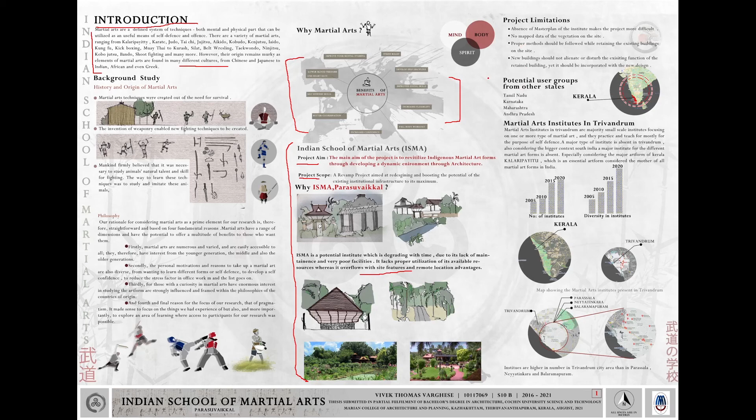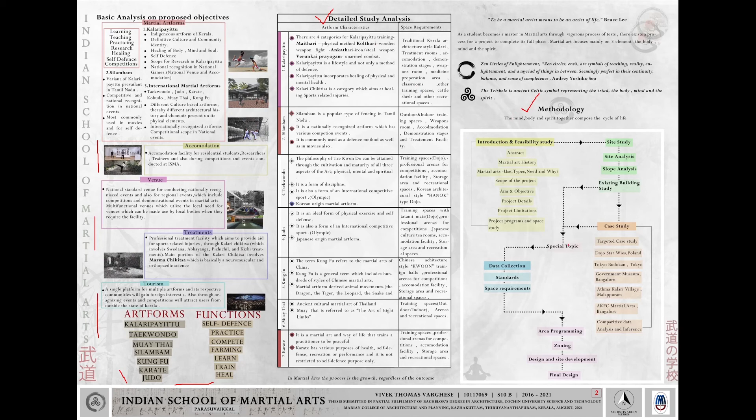Moving on to the next part, which begins with case studies for understanding the cultural, architectural, and other factors that aid in designing a martial arts institute. Five case studies were identified and analyzed to procure the inferences required for better understanding the thesis project.

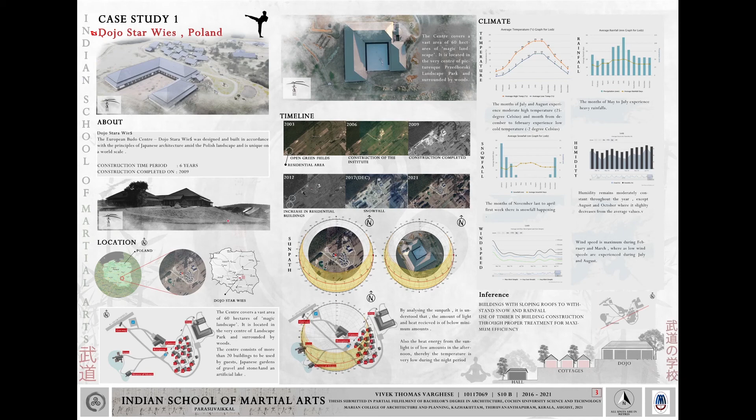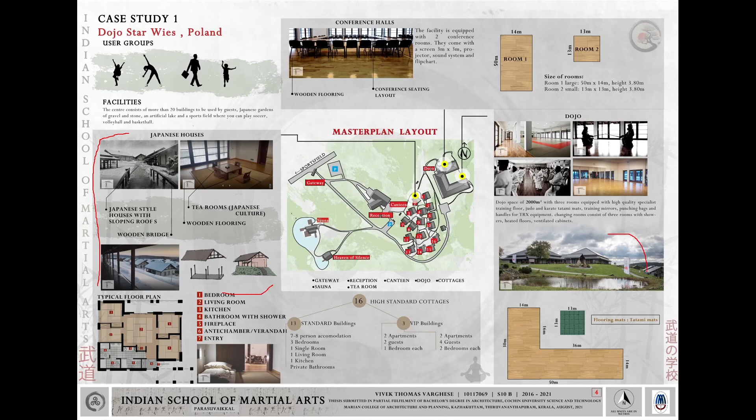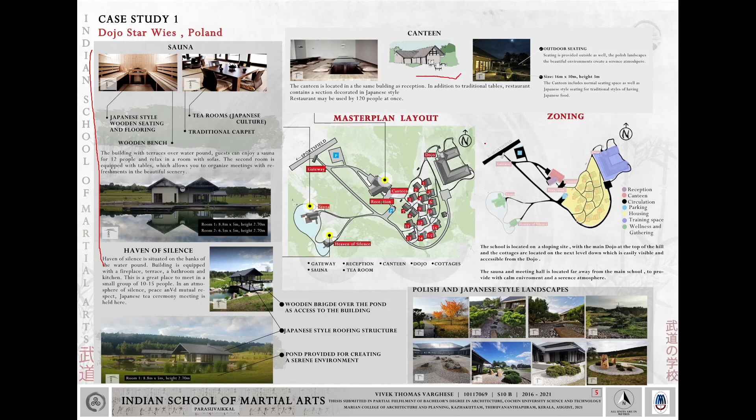The first study is based on a martial arts institute in Poland named Dojo Stara Wies. This is a unique martial arts institute combining Japanese architecture style with Polish landscapes, strategically situated on a sloping terrain. The major focus is the relationship of the Japanese style features with the sloping terrain, which creates spaces interactive with the users as well as the climate of the place. The development of the dojo on the topmost portion of the contour is also a prominent feature studied and considered for my project.

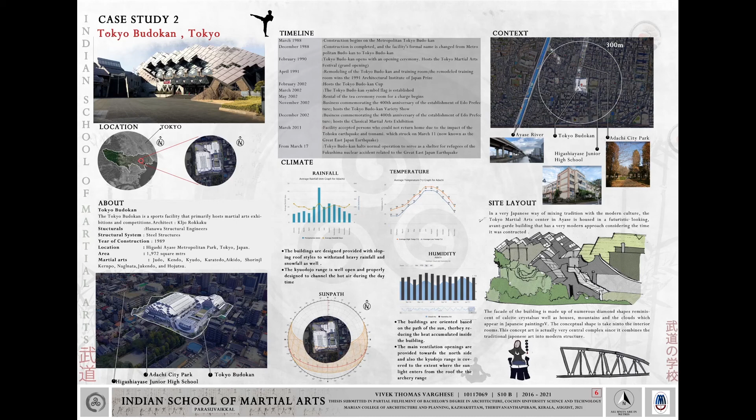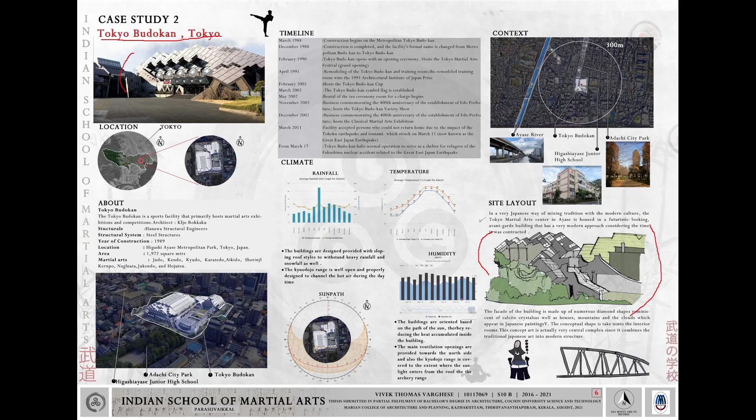My second study is based on Tokyo Budokan situated in Tokyo, a martial arts center larger in scale that provides support for various martial art forms and also works as a venue. The main inferences are observed from architectural elements influencing the design in the form of its exterior and interior form developments, and also analysis of the multi-level training areas.

The third study is a short study conducted at the Government Museum, Bangalore, to observe and analyze ancient weapons used in combat and to study preserving martial art weapons.

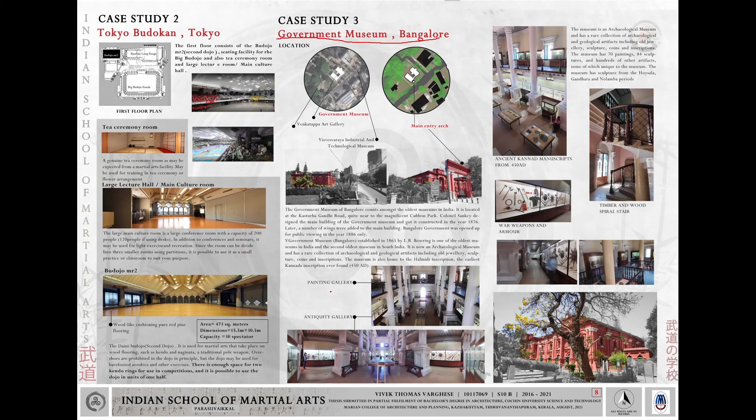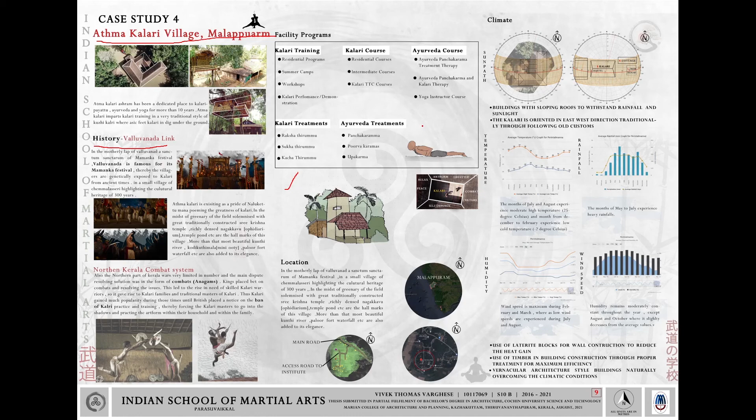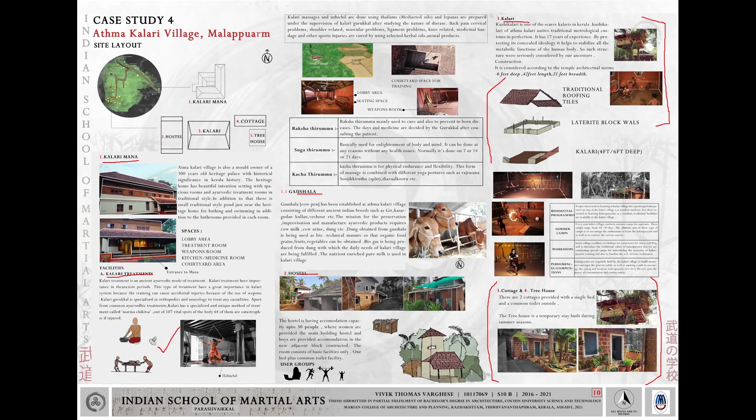The fourth study is conducted at the Athma Kalari village in Malappuram, a martial arts institute with roots from the Valluvanada era onwards. The traditional Kerala architecture style can be observed here, as well as the Kalaripayattu lifestyle, which is the major element focused on. The Atmakalari village has a Kalarimana training area, accommodation facilities, and programs required for Kalaripayattu. The major areas of interest are the community lifestyle of the Kalaripayattu students, the cultural aspects of Kalari Chikitsa methods, and the traditional Kerala architecture style that syncs with the community in this Atmakalari village.

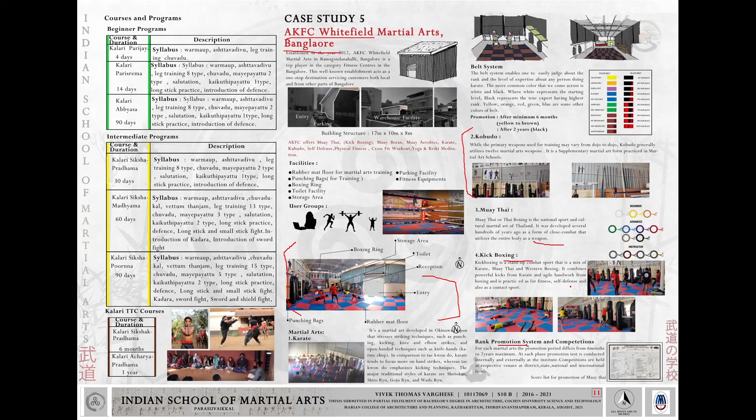Moving on to the next sheet, the comparative analysis matrix. This helps in understanding the relation between art forms and spaces in architecture, the material influences, the architecture styles, and the terrain influence, as well as the influence of art forms on creating the architecture style, which will be taken into consideration while progressing on the design stage of the thesis project.

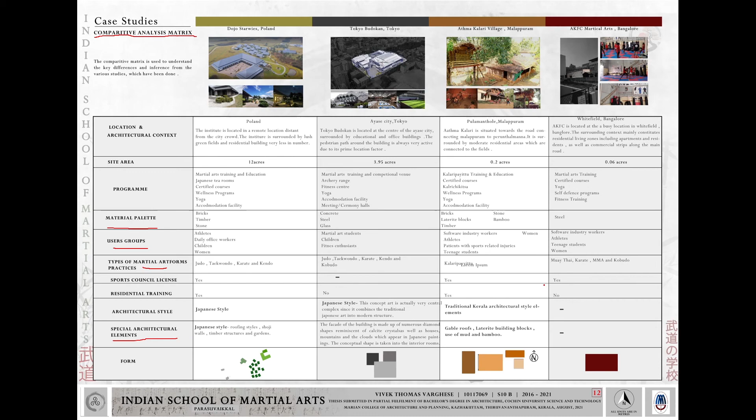Moving on to the next stage, the site study and site analysis. The Indian School of Martial Arts is located in Parasuvaikkal near Parassala, which is 30 kilometers from Trivandrum. The site is 300 meters from the National Highway 66 and easily accessible from the main road. The site has a total area of 8.5 acres of land, distributed over a contour terrain, with entry from the upper contour part.

Also, the site has existing structures in it. As the site already has a functional martial arts institute, the site feasibility becomes more solved. These diagrams show the context layers around the site, as well as the climatic study of the site area.

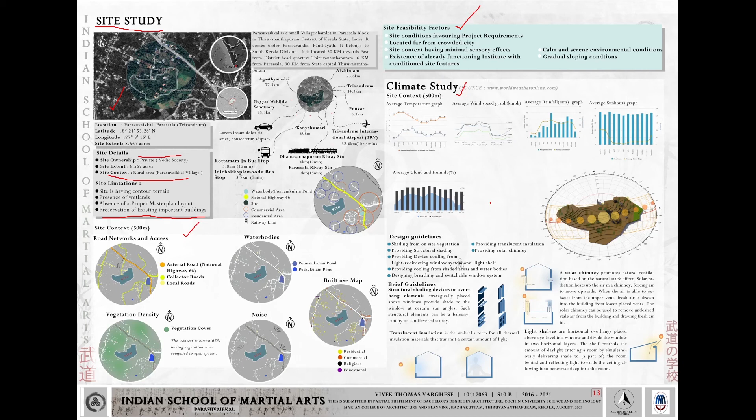The vegetation in the site covers up almost half of the site. The existing circulation path provides access to almost 25% of the site. The vehicular movement within the site is restricted more compared to the pedestrian pathways on the site.

Slope analysis has been done to identify the areas of ridges and valleys and also to maintain the watershed areas. The major factors to be considered are the extent of the agricultural land at the bottom of the site and also the watershed area on the site, which should be preserved for the natural water to drain from the site.

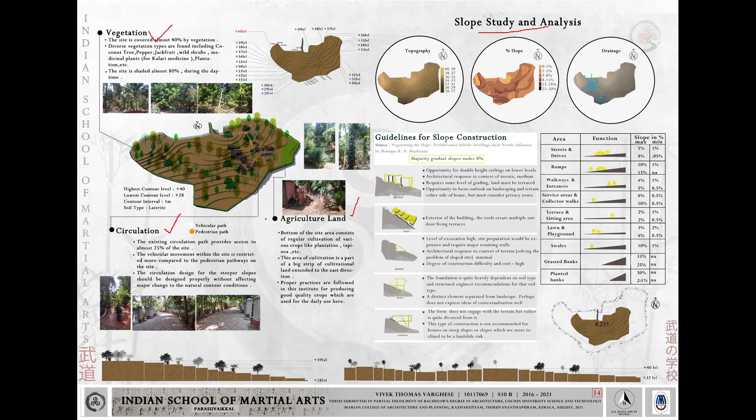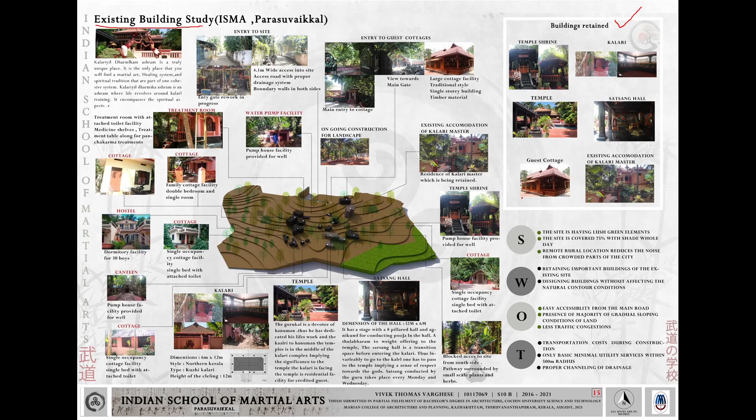Moving on to the design program and its users. Users are grouped and identified based on the context as well as the functional need of the average user, and classified into these aspects, which includes children, athletes, tourists, working people, and etc.

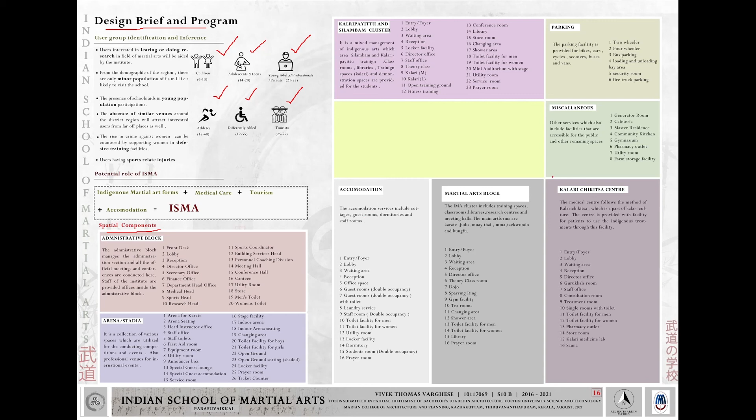Also, the spatial components are identified and tabulated based on the case study analysis as well as the existing features on the site.

Moving on to the area programming. This was tabulated by analyzing the requirements of the design programs and its spaces. Also, the spaces analyzed from the case studies were compared with the respective standard areas and tabulated to a total area of 11,353 square meters.

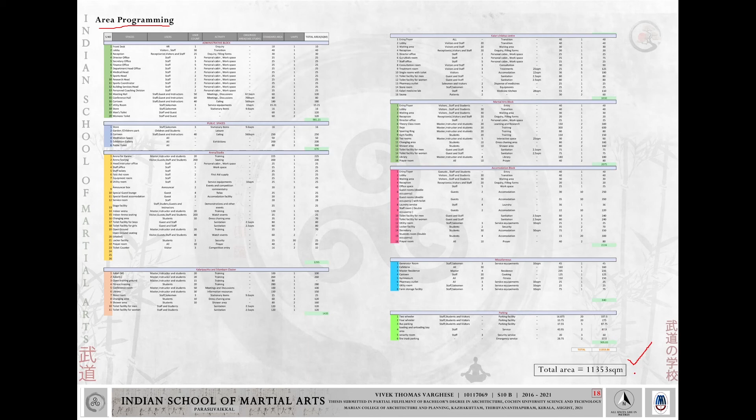Moving on to the next stage, that is zoning. The basic blocks included in the zoning process are the administration, the accommodation block, the Kalari Chikitsa block, martial arts block, arena, canteen and cottage areas, and other spaces. The zoning procedure initially followed a basic proximity matrix, hierarchy charts, and a bubble diagram to identify and analyze the spaces coming in various proximity zones and their respective functions.

The arena is located on the higher level on the site to highlight its importance, as well as for the easy development of the training spaces around the topmost corner of the site.

The accommodation blocks are positioned near the end of the site and close to the agricultural land due to the calm environment. The Kalari Chikitsa and the accommodation facility are positioned closer to each other so that users can access the treatment facility near the accommodation facilities.

A zoning development was followed to resolve access and preferred orientation profiles based on many site features, by understanding the sun path, vehicular access, and the proximity of adjacent buildings.

The watershed area on the site was carefully considered to avoid damaging the drain pattern. After considering factors like wind pattern, proximity matrix, sun path, and other variables, a basic zoning layout was prepared, and the initial zoning layout was developed.

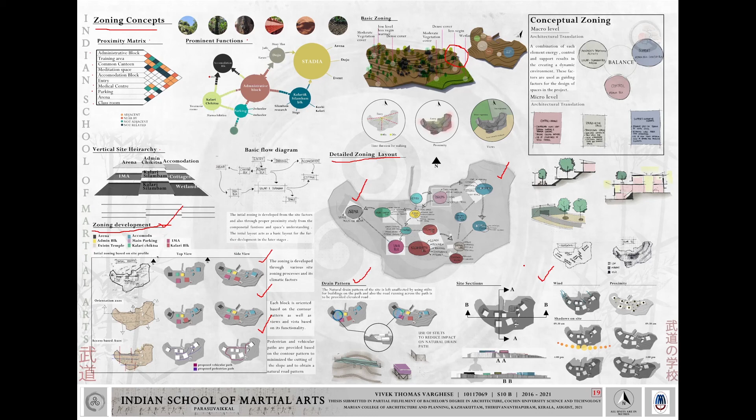Before reaching the master plan, the special topic is applied as a major design guiding factor. For the special topic, the idea focused on symbolizing bamboo in martial arts.

Bamboo is a common material in the world of martial arts. Even from ancient times, bamboo sticks were used for combat. Every martial art form in the world that uses weapons always starts with bamboo canes as the initial weapon of study.

For understanding more about the topic, the types of bamboo and its main features were studied along with its joinery details. From the spiritual aspect connecting bamboo to the mind, the hollowness of bamboo is symbolic of emptying the mind so that present mind ability is achieved.

Thus, bamboo is not only used as a material in this project, but also to reflect the ideologies of different martial art forms practiced here. This helps guide the direction of the design stages of the thesis where it is applied in practice.

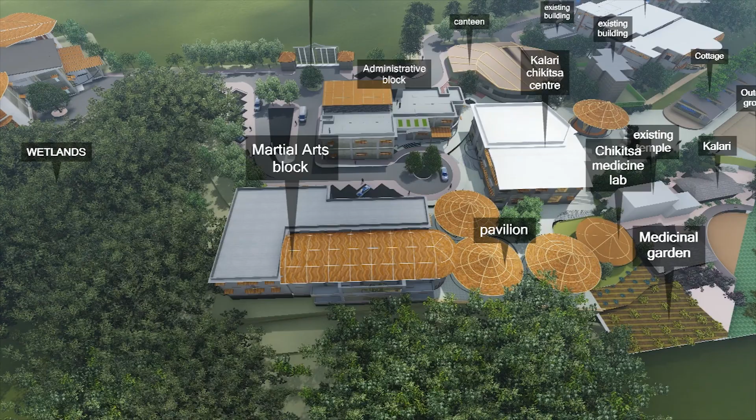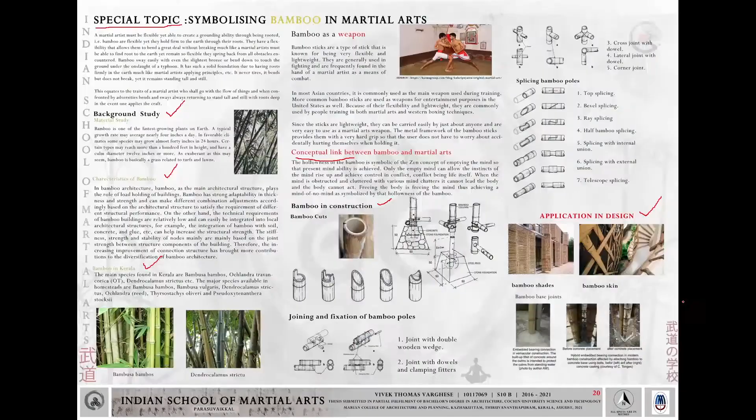The main gate entry into the site is welcomed with a roundabout with a large lush green tree, which gives the user a sense of calmness.

The user can proceed straight down the road and access the drop-off into these three blocks in this area, through which the Kalari and adjacent blocks can be reached by walking through this pathway.

This is the core portion of the site, consisting of the main components: the admin block, the Kalari Chikitsa block, and the martial arts block.

After this point, the user can drive back into the parking space provided or reach the arena through this direction. The arena is located far away from the blocks to maintain proximity and achieve a calm environment.

The accommodation portion of the site is concentrated towards this side, where the hostel blocks, cottages, and existing buildings on the site are present.

The existing buildings on the site were a prominent factor to be considered while zoning the layout. The existing accommodation and Kalari buildings have maintained their original positions on the site, and the rest of the layout was developed around them.

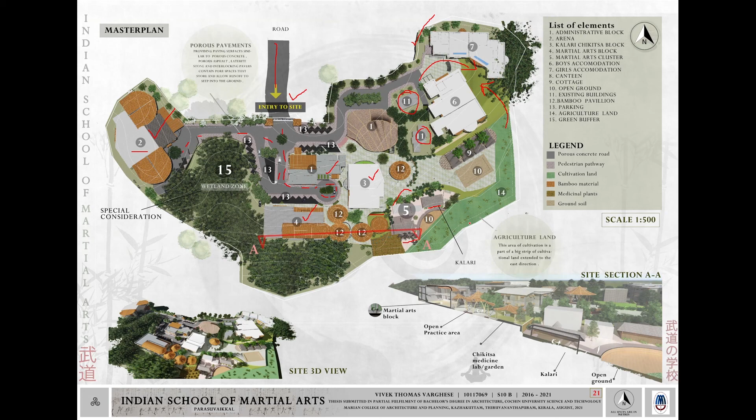These are the 3D aerial views of the site.

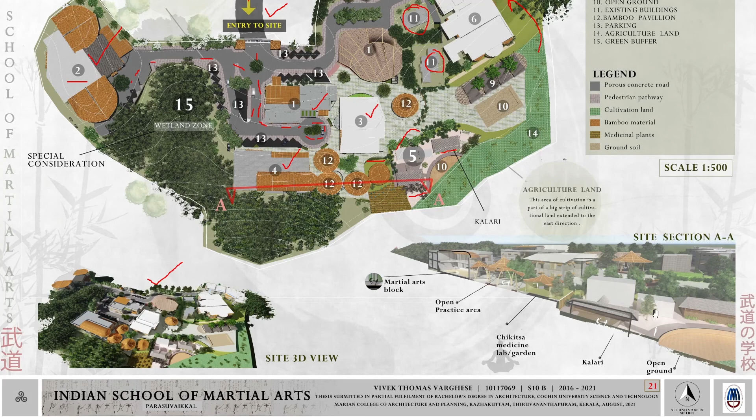This section cuts parallel to the contour directions, showing the Kalari towards the martial arts block. This stretch cut is the main activity area of the site, as the martial arts, combat training, and training happen majorly in these areas.

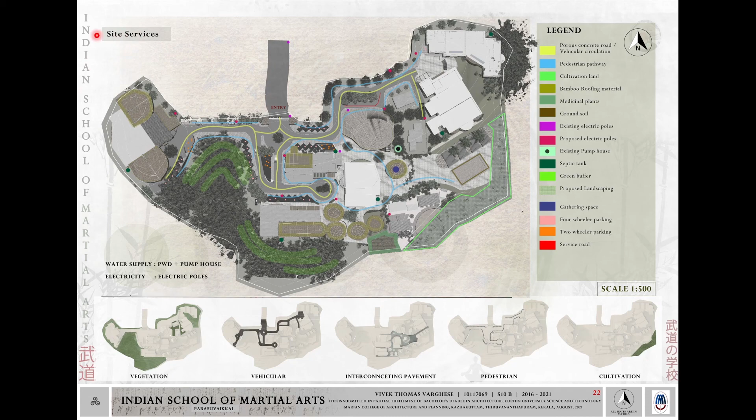Next, moving on to the site services and layers. The site services sheet includes the layers of the site layout as well. Shown below are the walkways, vehicular paths, agricultural area, pedestrian paths, and vegetation on the site.

The major highlights of this sheet include the dense green buffering around the wetland area, given to minimize the damage caused to the terrain.

Also, the agricultural land on the bottom is allowed to seamlessly merge with the design of the layout so that it can be used as an element for capturing the view from the cottages and the hostels.

The canteen is provided with a service road for managing service transports without any issues. Other basic services like electric posts and pump houses can be seen in this layout with respect to the legend provided.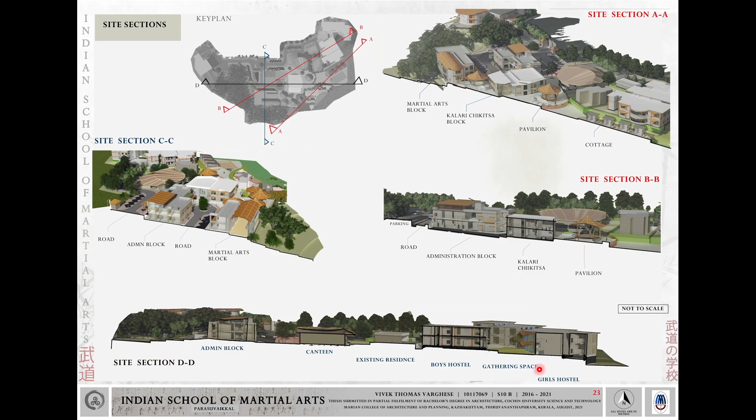Moving on to the next sheet, which is the individual block plans. The administration block.

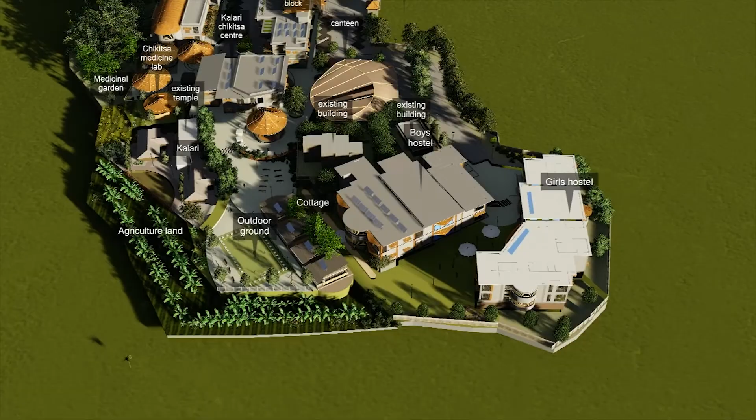The administration block is located at the central portion of the site, which is easily accessible from the main gate. The main entry to the administration block is from this point on the road, which is a drop-off for the admin block. These are the office spaces inside the administration block, and the staircase is positioned on the other side of the block. The toilet area is placed facing the back of the block to avoid the wrong flow of ventilation of bad odor.

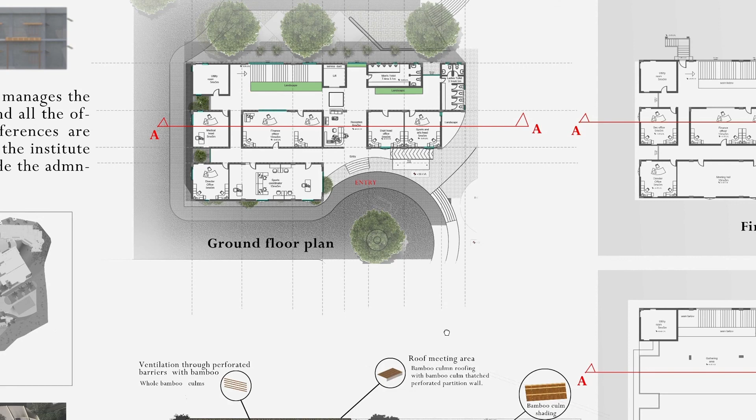In the section AA, it cuts through in its direction. We can see the activities taking place inside the administration building and also of the immediate environment like the parking spaces of the facility. The most ventilation openings for the admin block have been given with the use of bamboo poles, which are used horizontally for better aesthetics and also for maintaining the natural airflow without disrupting it.

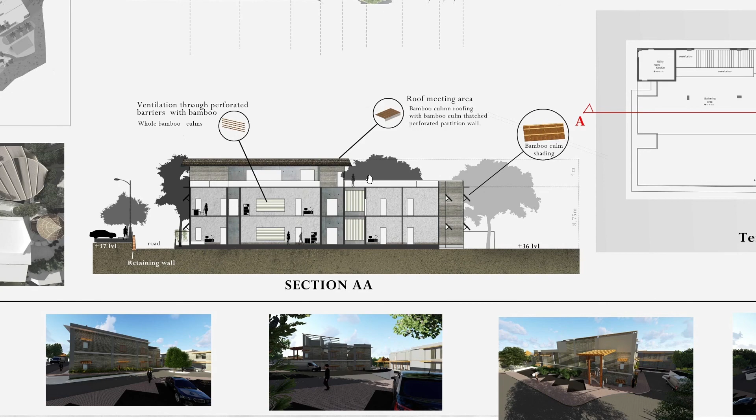This is a staff-only entry provided on the first floor of the administration building, which is accessed from the main road. The terrace floor is provided with a bamboo-roofed structure for shading purpose, and this area is also considered as an informal meeting space for the staff.

These are the 3D views of the building.

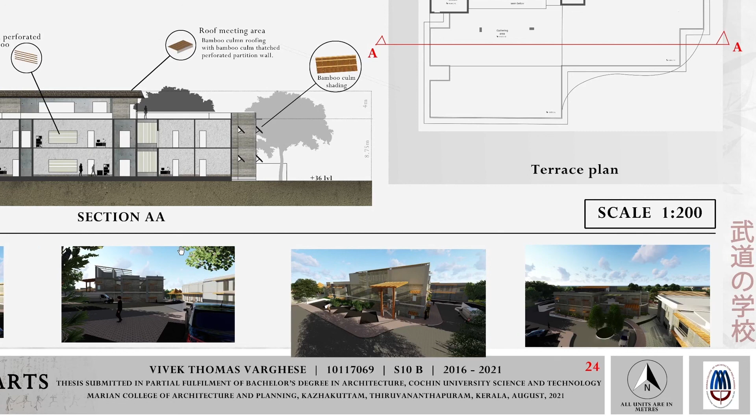Next, moving on to the next block, which is the arena block. This is the main competitional venue where the special competitional events take place inside the site.

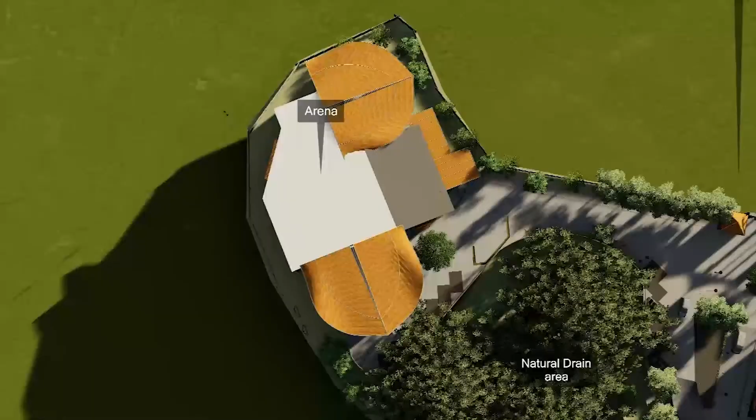The position of this block is on the topmost level on the site. The whole block is resting on 3 contour levels, which is a total of 3 meter height. This is the main entry towards the arena block, with a drop-off coming at this point. The drop-off is provided with staircase access and ramp access.

The reception and locker facility is provided near the entry portion, from where access to the next level, 2 meters above, is given using both ramp and stair access. In the next level, 2 meters above, the facilities provided are 2 dojo spaces, which are training spaces or competitional venues with seating for judges, participants and audience.

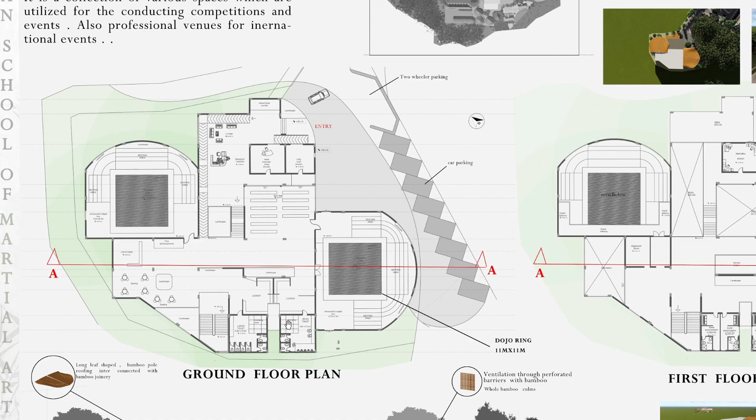Also, a cafeteria is provided along with the toilet facility that has locker and changing area facilities. This is a common area point for the participants to gather around and prepare for the respective competitions.

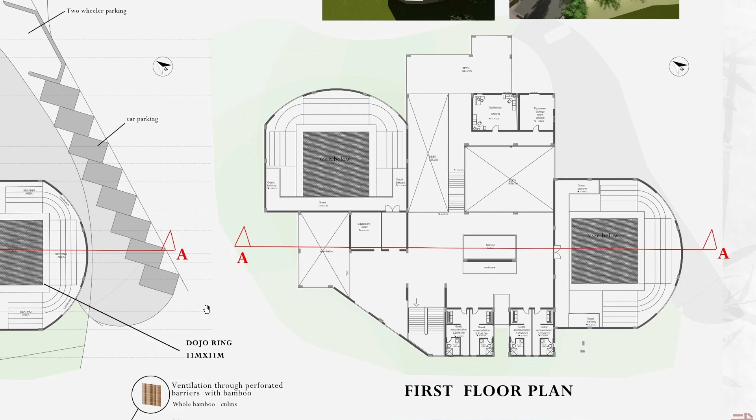The next floor can be accessed through the staircase. The next floor holds guest rooms, office space and also access to watch the competitions from the balcony for the special guests. In section AA, it can be observed where the balcony portion can be seen.

Also, the bamboo openings are given on the side. We can see the double height arena spaces for proper ventilation and lighting. The block has multiple roof styles, with sloping bamboo shingles for the main entry portion and leaf-like bamboo roof styles for the arena spaces, which adds aesthetics and a sense of natural look for the structure.

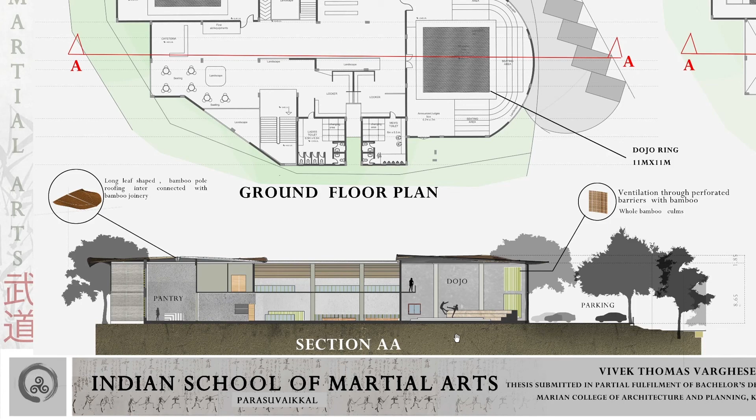Moving on to the next individual plan, which is the Kalari Chikitsa block. The Kalari Chikitsa block is situated in the central portion of the site, which is easily accessible from the main road.

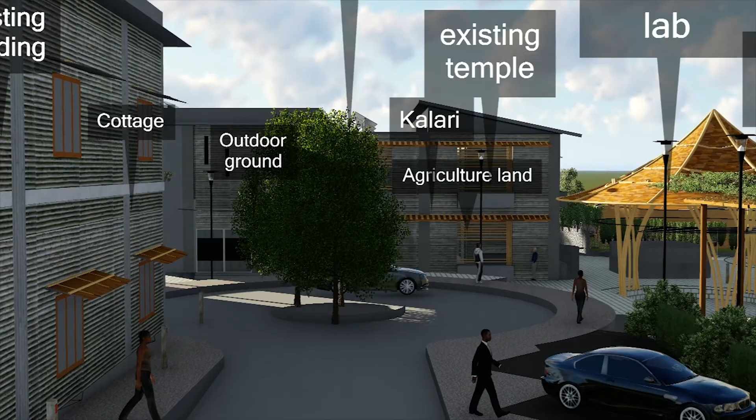It can also be internally accessed from the accommodation facility. The purpose of the block is to provide treatment facilities, especially Kalari Chikitsa, for users residing in the facility as well as people coming from outside who require the Kalari Chikitsa.

The main entry to the building is through this point, accessible through stairs as well as ramps. The whole building lies on a 2-level contour, and the ground floor can be fully accessed by ramps.

The main reception and the director's room are provided in the front portion based on the functional zoning. The reception area is adjacent to an outlet provided for buying Kalari Chikitsa medicine.

Users coming for treatment can inquire at the reception here and access the consultation rooms provided here, from where the treatment rooms are provided adjacent for better access.

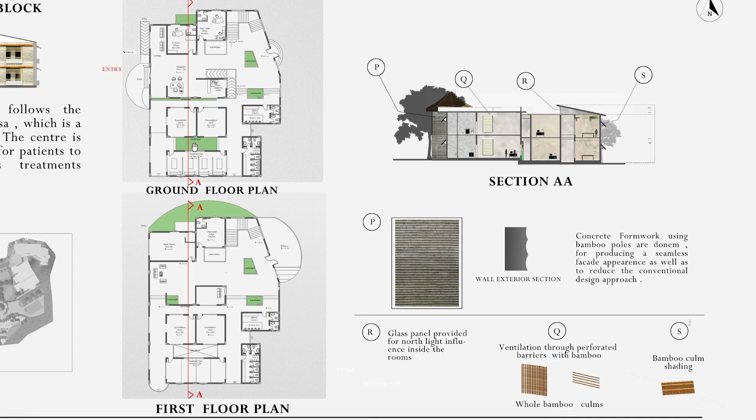Landscapes are provided in between the corridor spaces around these rooms for creating a sense of openness within the building. The corridor spaces are provided with bamboo pole openings with gaps for air circulation and light entry onto the rooms.

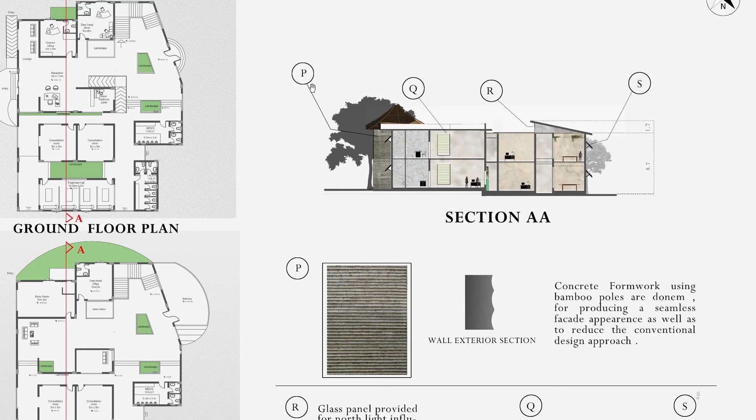In section AA, the section shows the area where the exterior of the buildings is done with concrete formwork using bamboo poles to create a rough and seamless appearance for the exterior. Also, glass detail is provided on the roofing design to light up the treatment rooms on the first floor.

And these are 3D images of the block.

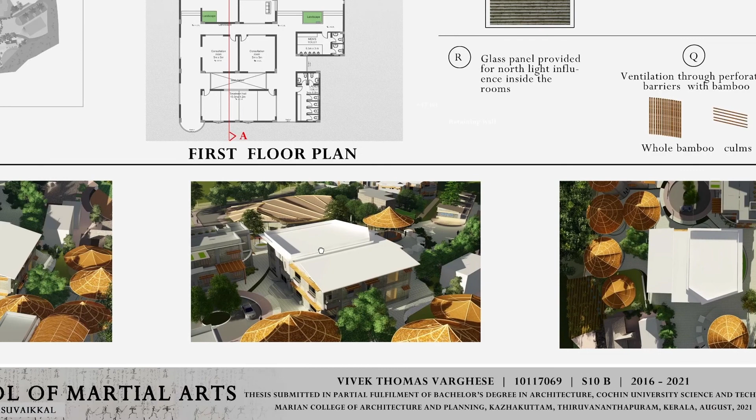Next, moving on to the next individual plan, which is the martial arts block. The martial arts block is a main training facility for international martial arts as well as Kalaripayattu, the indigenous martial art.

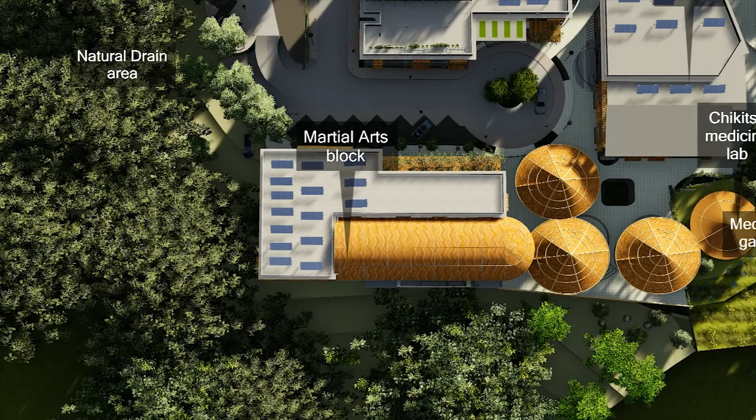The facility can be accessed from the main road through this point using stairs as well as ramps. The front portion is utilized by the office spaces and other finance offices.

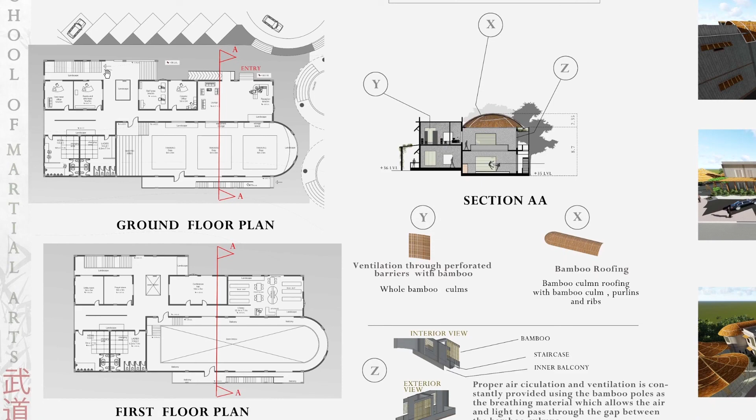Coming into the block, a courtyard is provided with stairs to the upper floor adjacent to it. The toilet facility is given to the south of the block to buffer the odor from the toilets towards the vegetation present outside it.

The main training area is accessible 1 meter down from the main entry level into the building. This training space is largely provided with openings with horizontal bamboo poles as barriers in these openings.

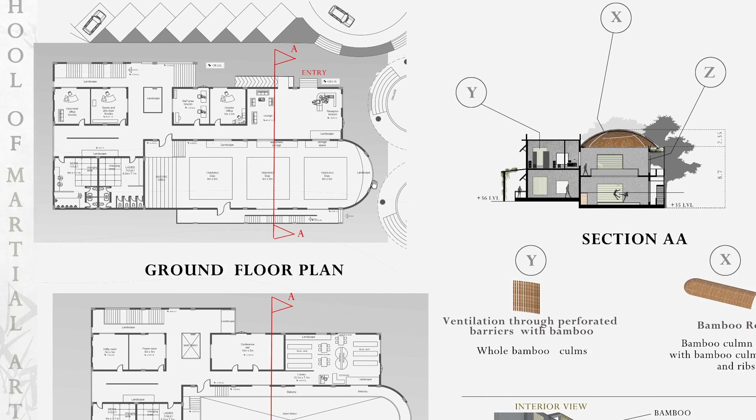This adds the element of natural atmosphere and allows plenty of light and ventilation to circulate inside the training space, which has a double height ceiling.

As we can observe in section AA, which is cutting from here, the main entry portion can be seen here with a shading device given.

This is the reception portion and the training space 1 meter down from the main entry level.

On the first floor, a small library is provided. Also, a balcony is provided above the training space which can be accessed from inside the building and also from the exterior.

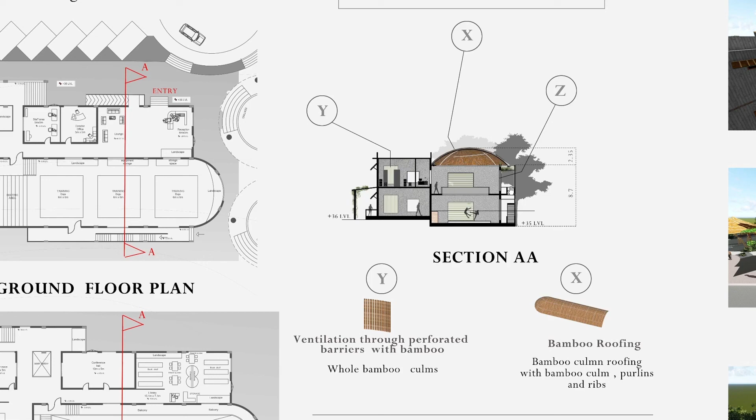These are the elevations of the south side, and also these are the 3D views of the block on the site.

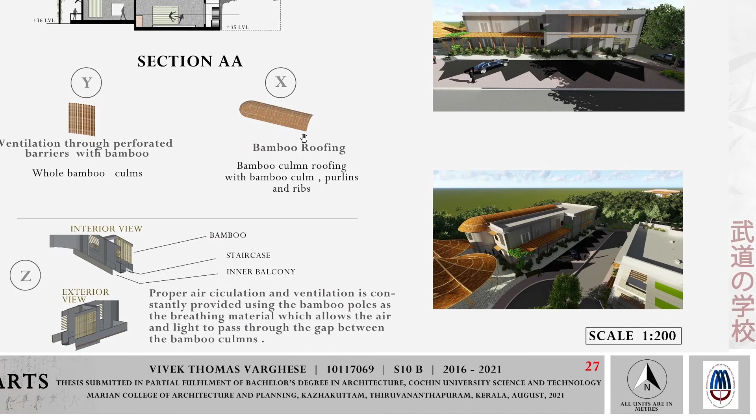Moving on to the next block, that is the accommodation facility. The accommodation facility consists of 2 blocks for the boys' hostel and the girls' hostel.

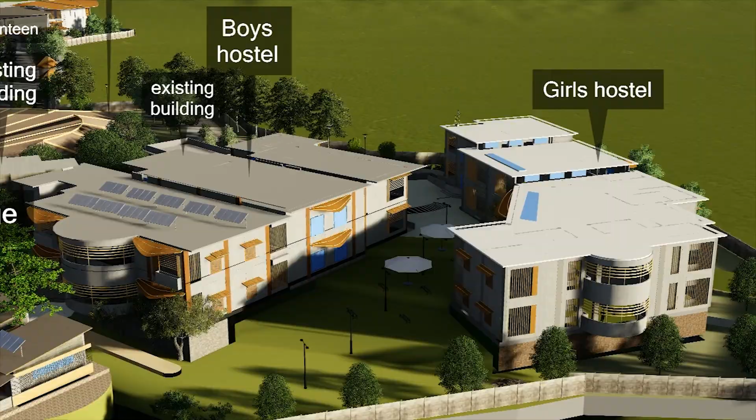Both blocks are designed on a 3-level contour terrain, and the block is functionally planned on that 3-level contour itself without altering the contour or damaging the terrain.

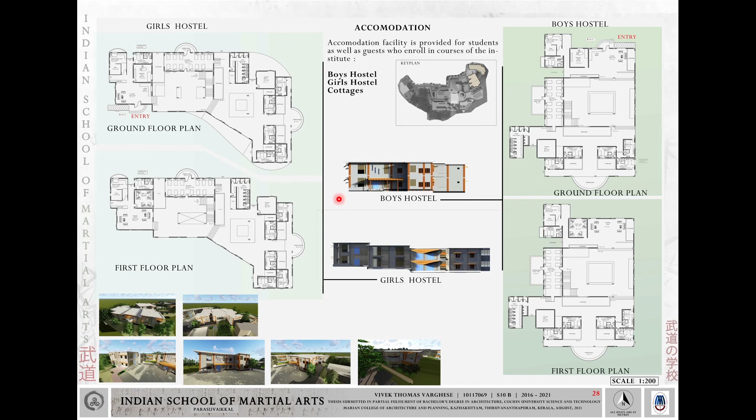Moving on to the next topic, the additional structures on the site. These include the martial arts cluster, which consists of the pavilion, the Kalari medicine lab, the Kalari, and also the cottages.

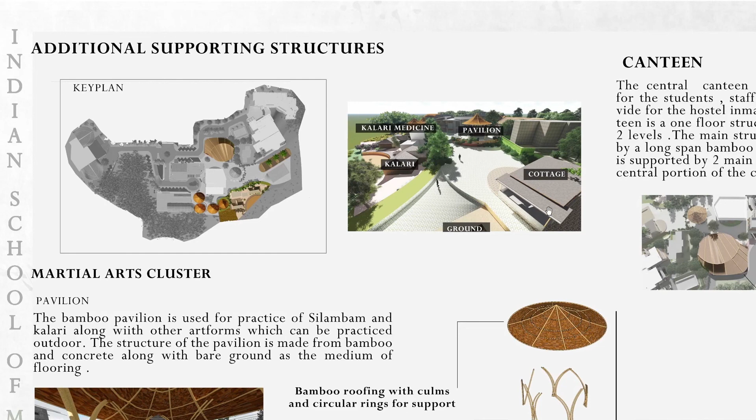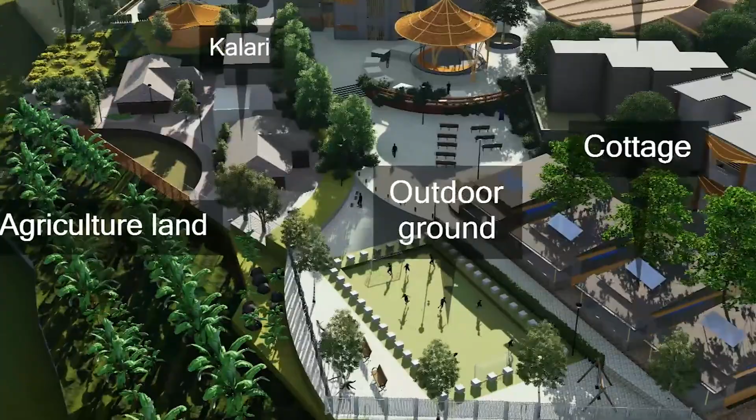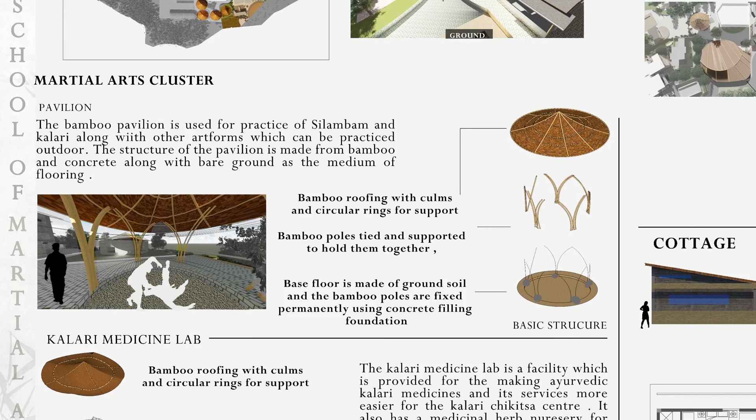The pavilion is a structure made from bamboo, used for conducting martial arts on the ground surface rather than indoor facilities. They are positioned along with the martial arts block for proper functioning. A basic 3D structure diagram is shown below.

The Kalari Medicine Lab functions as the main source of medicine for the Kalari Chikitsa Center. It holds the medicinal gardens and spaces for collecting and making the medicines. The structure is made fully from bamboo, and the structure diagram is shown below.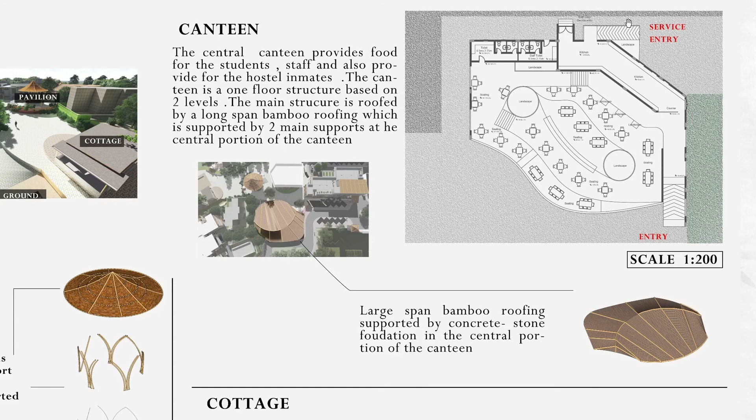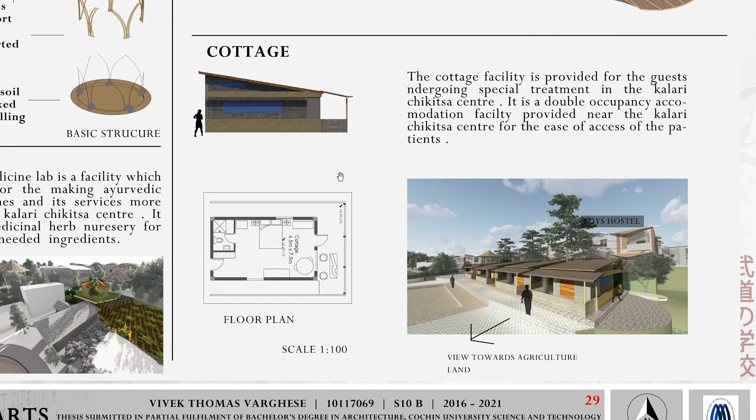Next are the cottages, provided for users undergoing treatment in the Kalari Chikitsa Center. A total of 5 cottages are provided with double occupancies, and this is the typical layout of the cottages shown below, along with their elevations.